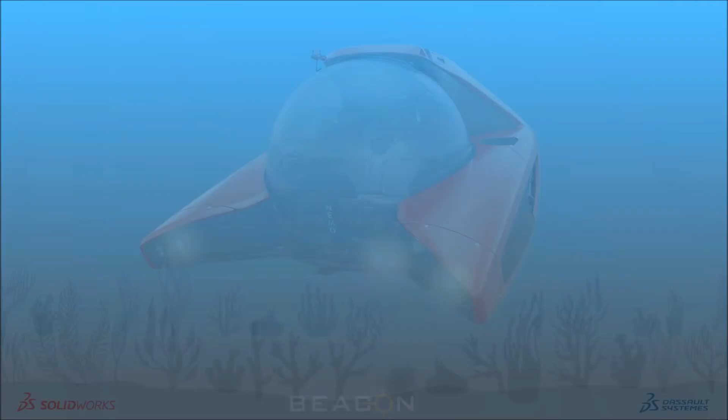What's new for SolidWorks 2022? To do this, we are using a data set featuring our long-term customer from the Netherlands, U-Boat Worx. They are launching their Nemo submarine, the name of the submersible vehicle, which is a luxury product called Nemo. We are going to use this data set throughout the presentation to show what's new in this release. It is one of the most sophisticated pieces of underwater tech available to customers, an award-winning revolutionary design personalized for individual use. We are proud to be part of their innovation all the way, and we would also like to be a partner for your next great product.

SolidWorks 2022 is the 30th release of the tool. As usual, new enhancements in this release are power-packed to work smarter, work faster, and work together. This is the theme that the complete SolidWorks 2022 release is being built upon. Now sit back and take in everything new in SolidWorks 2022 and the 3D Experience Works portfolio.

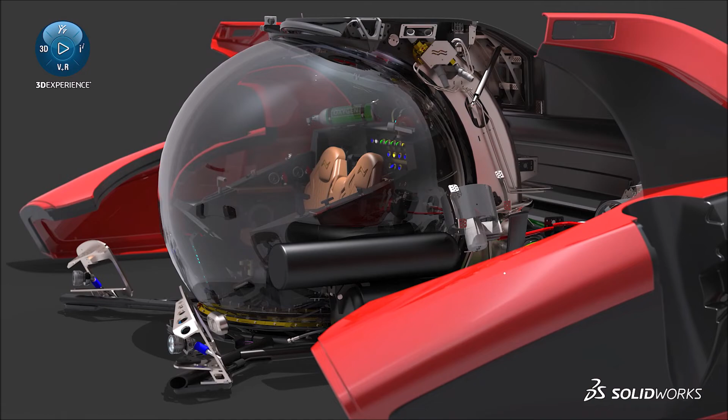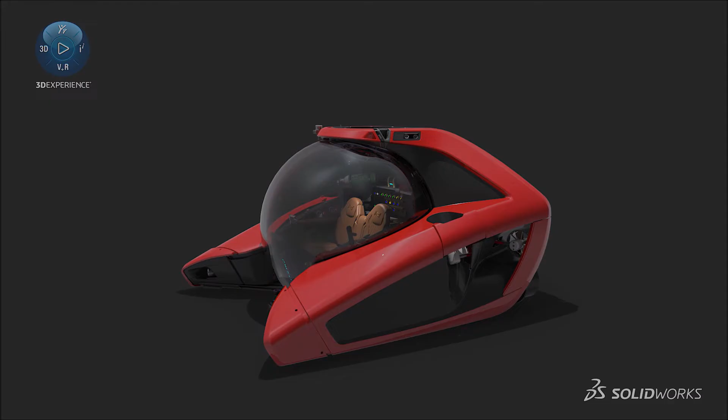The complete enhancement set for the SolidWorks 2022 release has been segregated into three segments. In this webinar and presentation, I'm going to touch base on SolidWorks 22 on the surface to give you the greatest enhancements, and then we're going to take a deeper dive to look into more detail of the enhancements. For the 3D Experience Works portfolio, which has the deepest capabilities, I'm going to give you a gist of it, but we have an upcoming webinar where we'll cover that in more detail.

So SolidWorks 2022 on the surface. Let us begin with it. Again, as I told, the theme for this complete release has been around working smarter, faster, and together.

Let us look at one of the smartest enhancements. Being a SolidWorks customer and user, you must be well aware of one of the unique features, one of my favorites while using 3D CAD inside SolidWorks, for maintaining different versions of the design. That is, by default, configurations. Configuration has been there with SolidWorks for a long time now, and it's been used to create different versions, different variations of the products, whether you are at part level or assembly level.

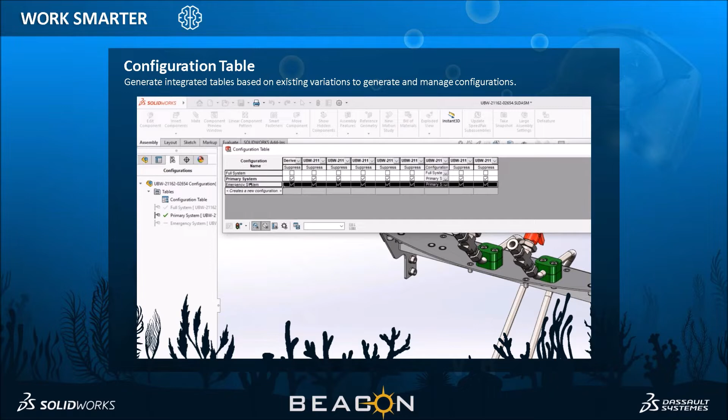Yet another announcement on Work Smarter is something called component pattern, pattern-driven component patterns. It has been smart enough to understand the way the patterns are being done, and to leverage each and every feature of the components mating to one another. So it has been enhanced to be more smart.

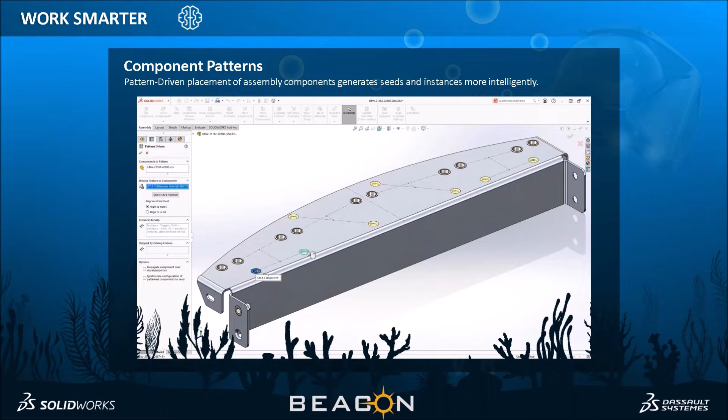What's new for 2022 is a brand new user interface to manage your geometrical tolerances. We have a brand new user interface so that the complete step-by-step workflow allows you to define the most complex requirements in terms of manufacturing intent.

Yet another new tool that's brand new to SolidWorks this year, in the 2022 release, is something called the Stud Wizard. We have been working with hole wizards, advanced holes, so threads - this is a brand new enhancement. We are going to have a deeper look into this as well.

Yet another mantra towards SolidWorks in this release is how we can work faster, the need of the hour, as the designs are getting more complex, getting larger, with more complex details. So we have a few enhancements which are really great and time saving.

One of the enhancements in terms of user interface for this year is something called command search, which has been unified with the S key keyboard shortcut. You can directly search for commands with just the S shortcut. That's another enhancement coming to your mouse pointer.

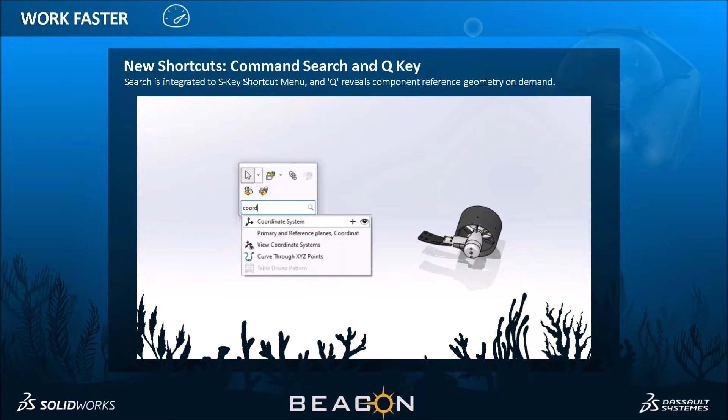Another enhancement on work faster: now you can directly open detailing mode drawings from Large Design Review. So now you have greater access, toggling between large assemblies in a 3D CAD environment and moving them to the drawing environment for more detailing.

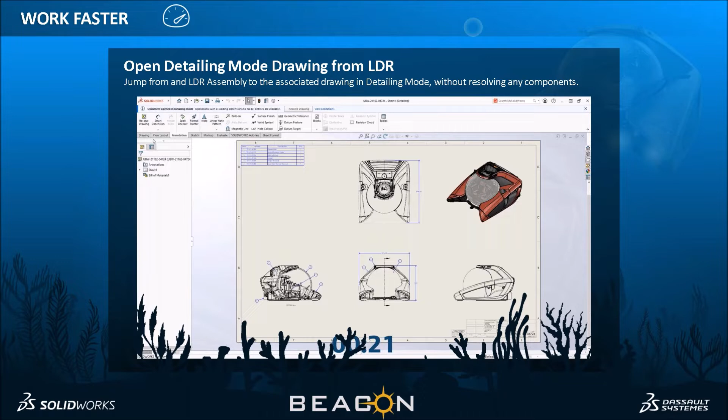Yet another enhancement towards working faster is now you can directly open up sub-assemblies in large design review or lightweight mode.

The quick mate toolbar, which has been people's favorite in terms of mating components and reducing your mouse travel time and clicks, has more enhancements and has been made more intuitive to use from this release.

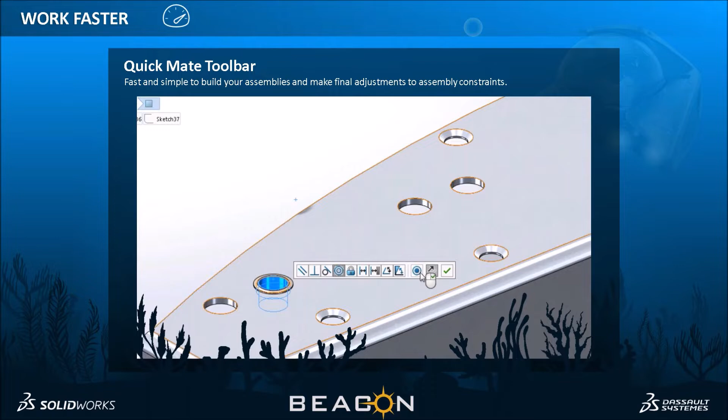Coming back to the detailing mode, from design to manufacture, we have more enhancements towards how you can add new standard views, how you can incorporate hole tables, and all of this happening in the detailing mode, which were not there in earlier releases of SolidWorks.

Moving to the next segment, that is work together. We have a brand new tool which has been there since the last 2 or 3 releases of SolidWorks - that's cloud-based sculpting, which comes up with new workflows and new powerful subD modeling solutions as part of the 3D Experience Works portfolio.

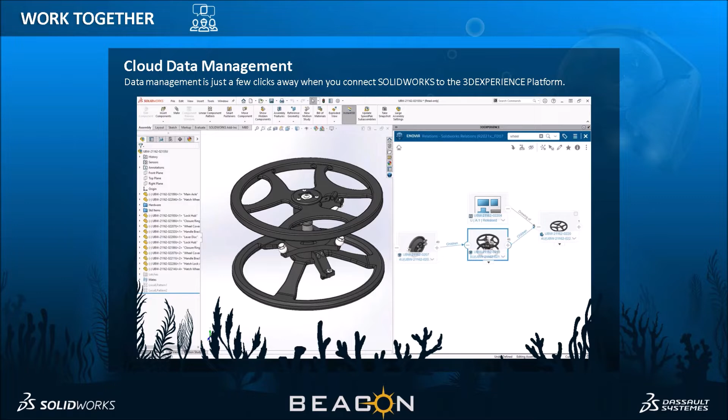And in the 3D Experience Works and 3D Experience portfolio, we now have cloud data management powered by ENOVIA PLM, and simulation without limits - a lot of capabilities coming in from the Simulia brand in terms of structural, fluids, plastic injection, electromagnetics, where you can take your SolidWorks models and have a tight integration, pushing them to Simulia workflows.

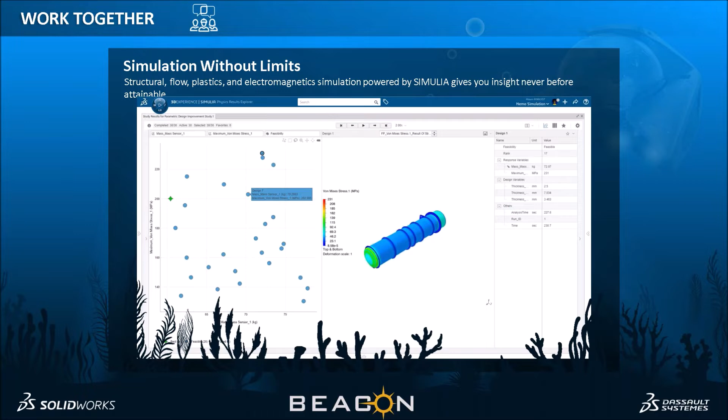Yet another offering from the 3D Experience Works portfolio is SolidWorks in a brand new avatar, called 3D Experience SolidWorks. This is one of the out-of-the-box platforms having inbuilt PLM technology, where you can have connected workflows.

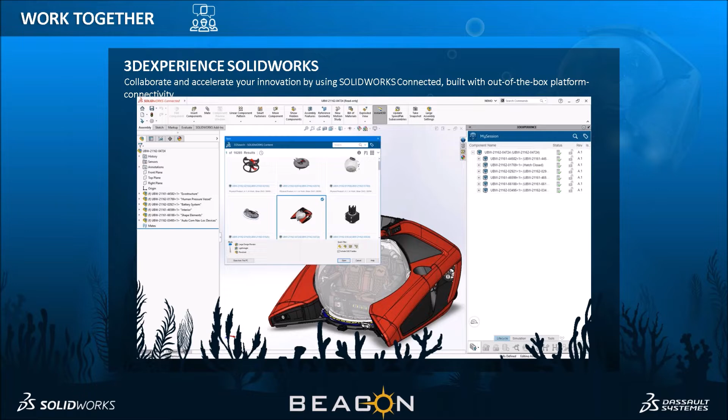So let us move towards a deeper dive for SolidWorks 2022. I would like to start with this session by showing the enhancements for the user experience.

As we saw on the surface, we have the command search now integrated in the shortcut bar. We have more enhancements toward coordinate systems in terms of how we can define them. We have a brand new shortcut, the Q key, coming in the keyboard shortcuts to increase productivity. We have a lot of system control options for how you can control dismissed messages, notifications, and bars. And one of my favorites in this section is the pack and go, which now gets a progress bar. So let's go have a look at these enhancements.

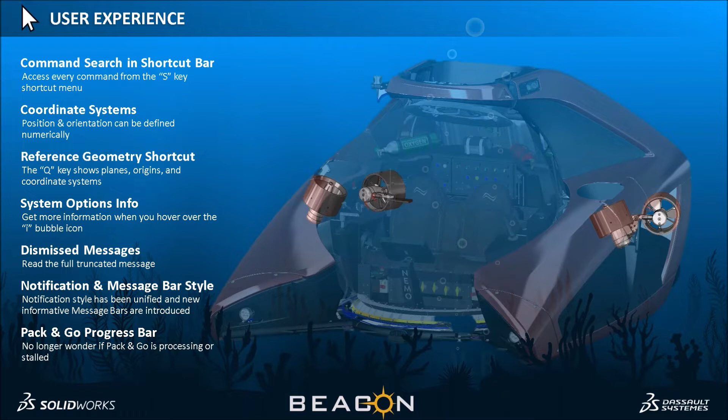SolidWorks 2022 helps you be more productive with powerful user interface enhancements. A Nemo submersible is not complete without all its thrusters in place.

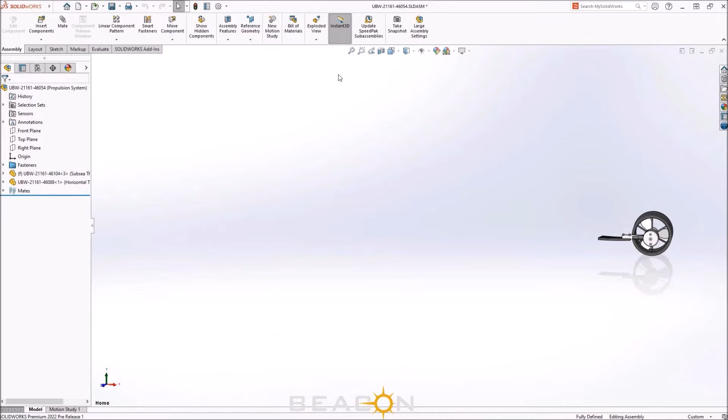In SolidWorks 2022, as we were discussing how the command search engine is integrated, now with just a stroke of a key, the shortcut, the search command is integrated, and you can have SolidWorks show it to you in the command manager as well.

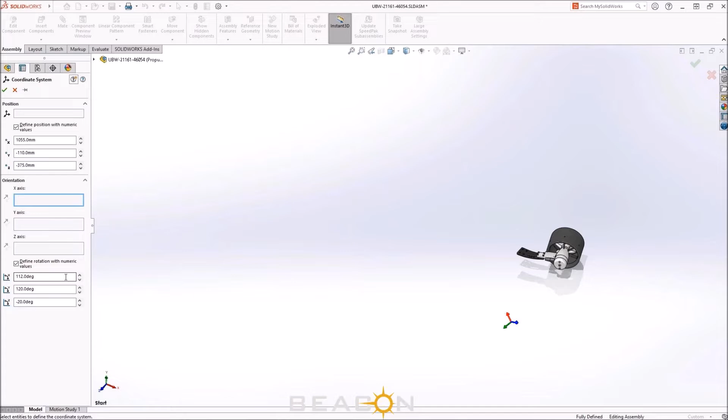In SolidWorks 2022, coordinate systems can be defined by user-specific numerical values, giving you complete control on how you orient the component and define it using numeric value input. This is a brand new enhancement.

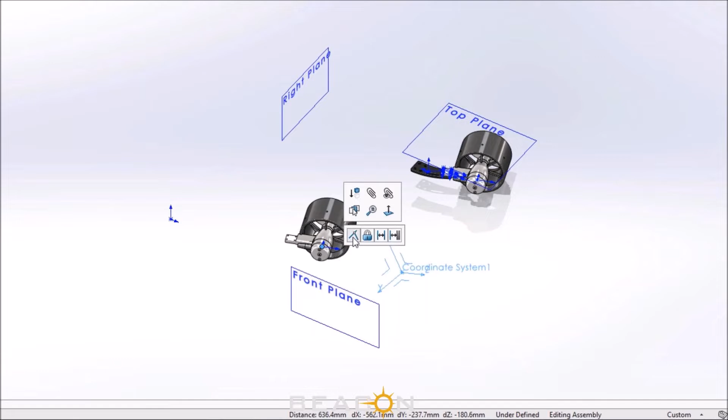Origin visibility is currently turned off to reduce clutter on the screen. With the new Q key enhancement, you can toggle between part or assembly reference geometry such as planes, coordinate systems, as well as origins.

Coordinate systems have also been visually and functionally changed. Their axes, planes, and even points themselves can be used to create section views, sketches, and more.

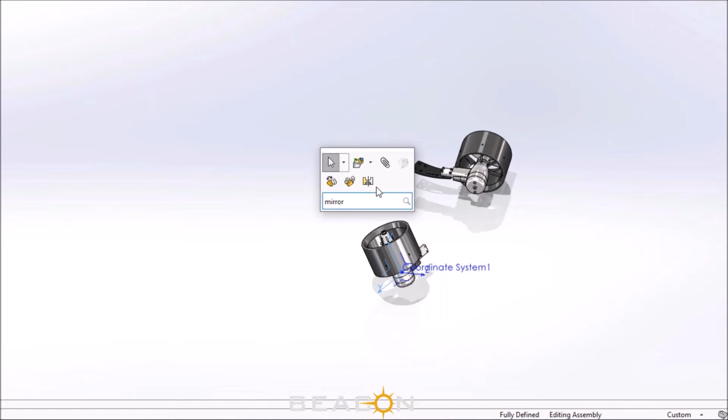These thrusters need to be mirrored on the other side. A commonly used command like this can be conveniently added to a shortcut key with just a stroke of a click. And the new Q key shortcuts even work while creating features.

Many other components of the user interface have been overhauled to give you a more appealing and visual experience. These bubbles appear throughout the system options, giving you more insight into the settings. Dismissed messages have always been easy to show again, but now hovering over them gives you more insight. Notification reminders like this have now been unified in style and appearance.

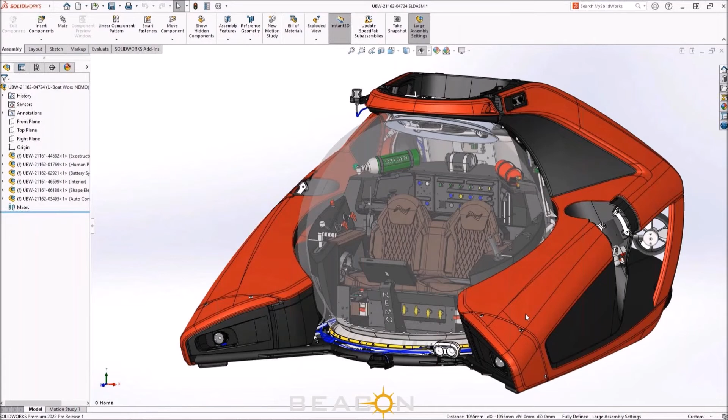The most favorite topic, that's pack and go. That's one way where you can collate the complete project with all its reference components. Now these tools get a progress toolbar, and that's why it's one of my favorites -- you can directly know how long these components are going to take to get packed and loaded. The world's most user-friendly 3D CAD software is now even easier to use.

Moving ahead, we have enhancements coming in the parts environment. We have enhancements in hybrid modeling which ease a lot of workflows for people working with vendors and different B-rep mesh geometries. We have some enhancements made to the hole wizard slots in terms of how you can orient them.

One of the most asked-for features: now we get an enhancement for draft on components, where you now have the option for a bi-directional draft. We have some enhancements again in pack and go in terms of component referencing. We have a section plane which can be taken on an axis, cylindrical face, or conical face. There's a brand new stud wizard and configuration property. Let's take a deeper dive into this.

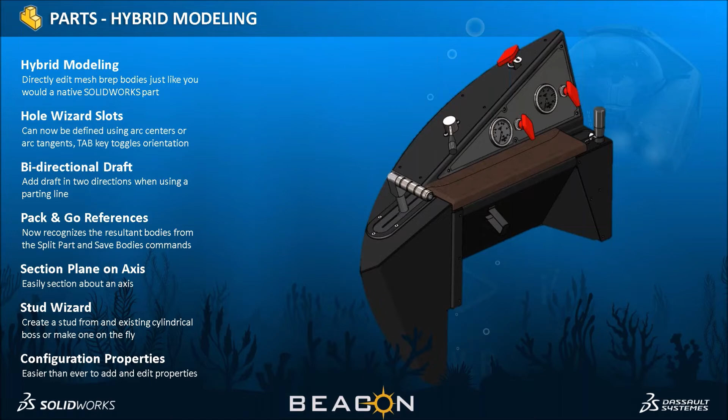For designers, the ability to create manufacturable products comes with an ever-increasing variety of file formats. So SOLIDWORKS 2022 now makes it easier with the new enhancement using B-rep mesh formats. In this example, for the ball valve on the control panel, it looks perfect, but the handle is too plain for a luxury product like the Nemo submersible.

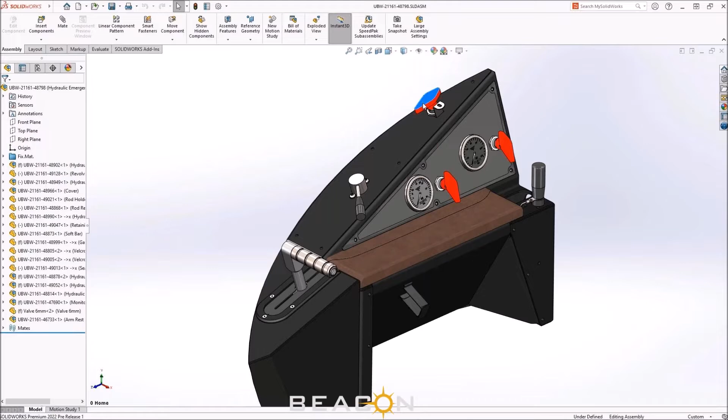The supplier has provided these particular files in B-rep mesh formats. But in SOLIDWORKS 2022, working with these files is just like working with native geometry, thanks to the new hybrid modeling capability. Now you can directly create chamfers, extrudes, and such features without needing to create intermediate bodies -- it's just like working within the native SOLIDWORKS CAD environment. This is my personal favorite. Now this particular handle needs a slot to lock or restrict its rotation.

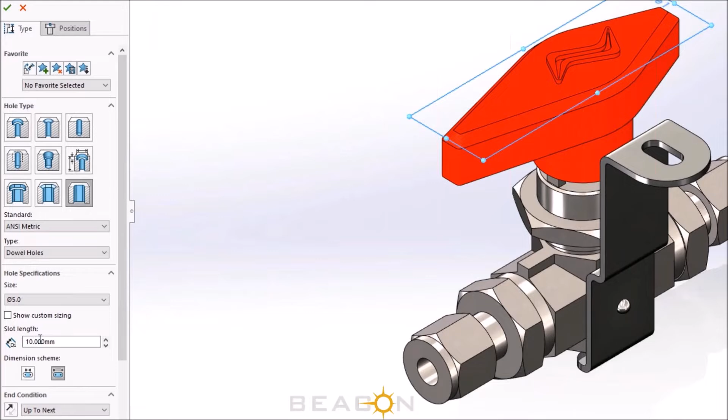In SOLIDWORKS 2022, we have an enhancement to the slot in the hole wizard, where you can define the length of the slot either by defining the arc tangents or the hole centers. Also, using the tab key, you can toggle between vertical and horizontal positioning.

Manufacturing this handle needs a bi-directional parting line draft, which is the most appealing approach. In SOLIDWORKS 2022, you can now create drafts in both directions using a single draft command with a parting line draft, avoiding the need to create two different features.

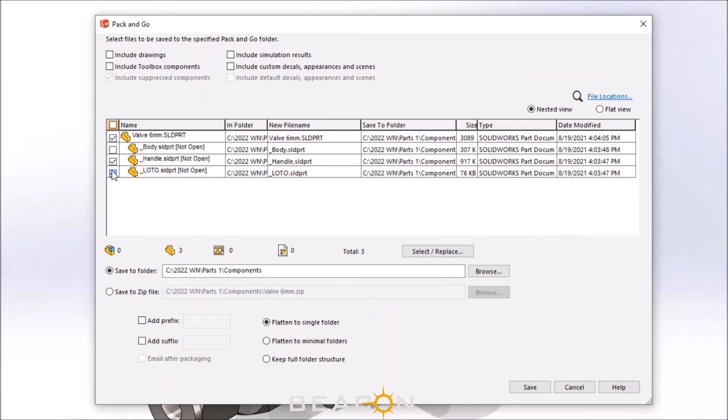This multibody file contains 3 different bodies, but the manufacturer needs access to the individual components. In SOLIDWORKS 2022, Pack and Go now recognizes the features and references created when using the Save Bodies and Split Part commands, so you can choose which files to send without manually searching in Windows Explorer.

Section views are a great way to show and inspect details. Now you can specify section views from any cylindrical face, conical face, or even an axis.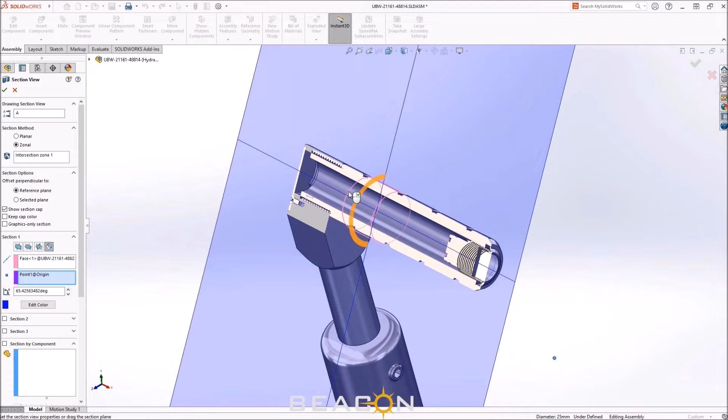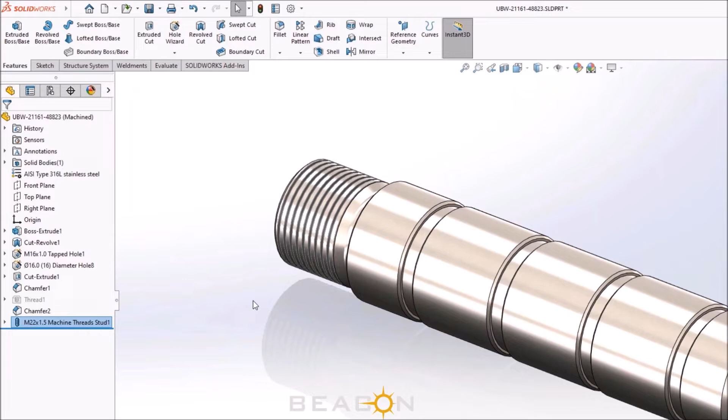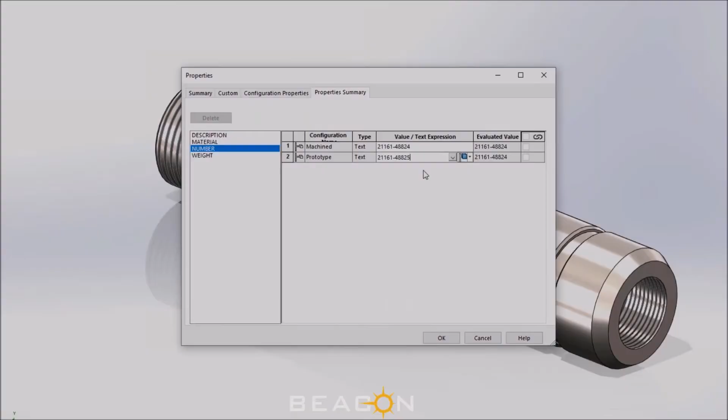What's new for 2022 is configuration, which is now segregated into configuration properties and property summary. In the first tab, property information can be added in the conventional way, choosing which configuration the values need to reflect. In the second tab, you can compare custom properties of each configuration and have greater control over how you make changes.

Moving to the next subsection, assembly performance. Most SOLIDWORKS users building large assemblies have at some point faced issues manipulating larger assemblies, in terms of opening times and manipulation times. To address this, SOLIDWORKS, over the last couple of releases, has come up with a lot of enhancements on Large Design Review mode, or LDR as we commonly call it. LDR mode now has more enhancements.

This is one of the lightning fast ways to access your assemblies with very few limitations. Let's take a look at how this assembly performance has improved.

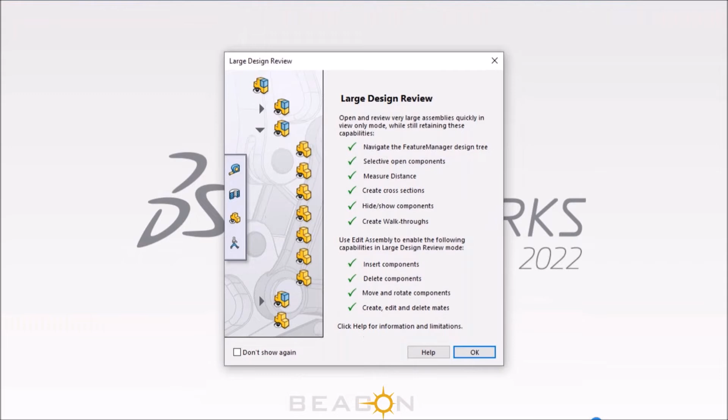The Nemo submersible is very complex, with around 6,031 components from U-Boat Worx. This complete assembly opens in merely 12 to 13 seconds. Let's put a clock on it and check. 6,031 components just loaded within 13 to 14 seconds, and it's up and running. This is one of the brand new enhancements on the LDR mode.

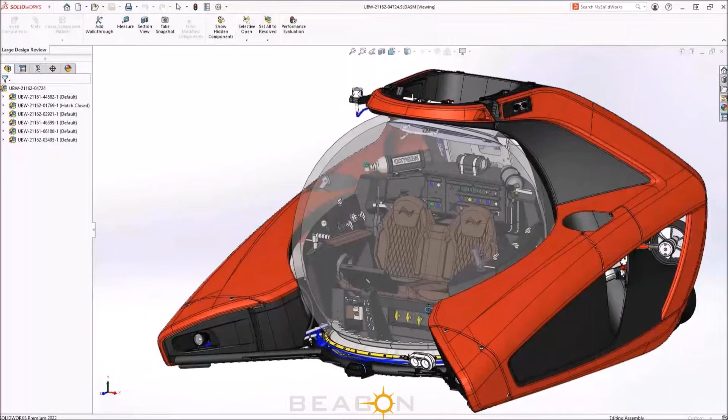What's new for 2022? You can directly access drawings of large assemblies from the right mouse click menu. Detailing mode is the most efficient way today to open and work on larger assembly drawings, and similar to Large Design Review mode on the 3D side, drawings now open in about 20 to 25 seconds. This is one of the great announcements which I have personally liked.

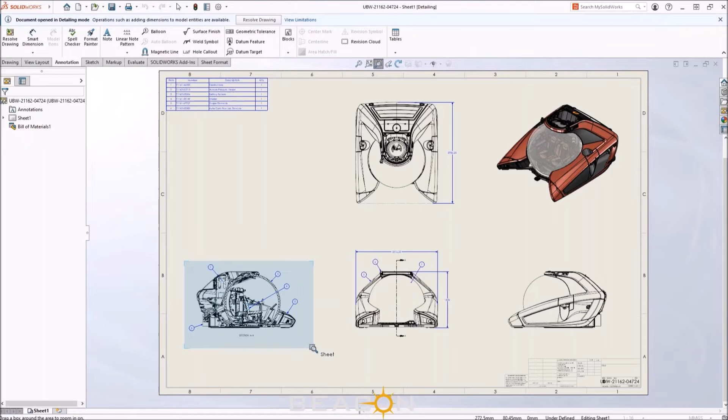It's an interactive way to work with large drawings and previously created views. You can continue detailing your design by adding dimensions, notes, tables, annotations, balloons, and more, with the ability to quickly access drawings from Large Design Review mode. This way, you streamline how you work with large and complex designs.

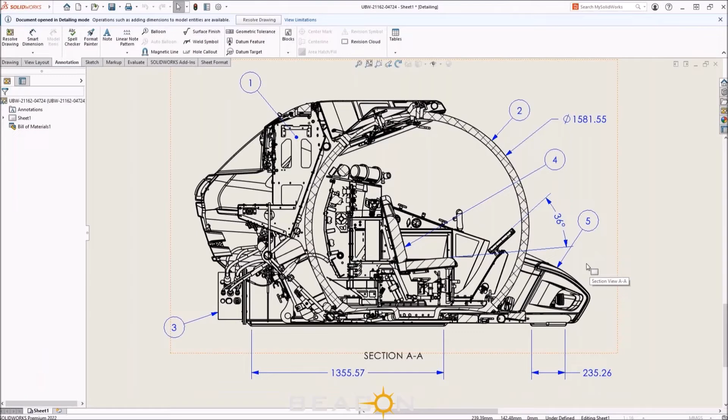Additionally, in SOLIDWORKS 2022, you can also open sub-assemblies in resolved mode or lightweight mode. This way, you can access the components in more depth and detail if you want to edit them.

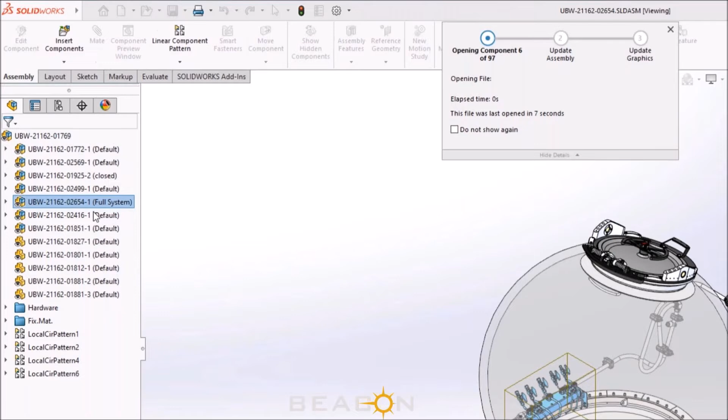So for this example, we are opening up one of the sub-assemblies in the resolved mode so that it is accessible and editable to us. You can choose a part, assembly, or sub-assembly through the breadcrumbs to be opened and made accessible.

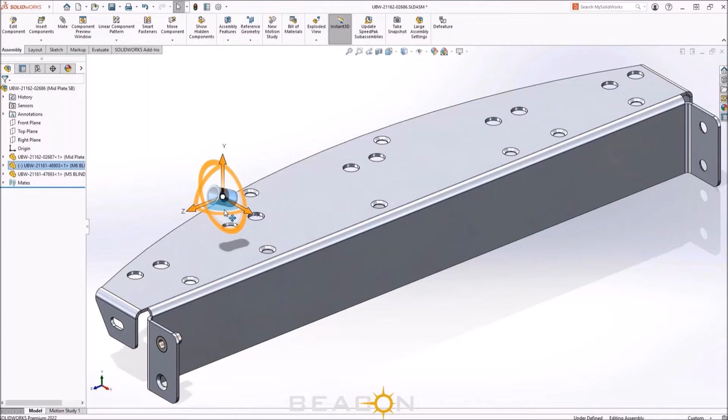What's new for 2022 here is moving the component. The moment you select a component from your feature manager, you now are introduced with a triad, which makes it simple to orient the component in the desired direction.

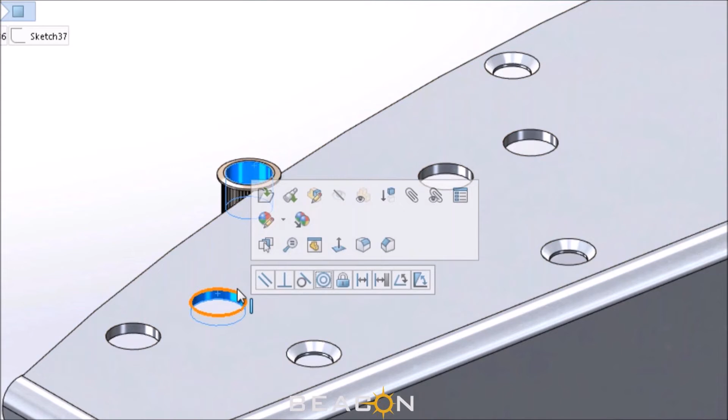The quick mate toolbar, which I've been discussing, now has more enhancements. It gives you more control in terms of how the components are aligned and mated to each other, whether you want to lock the concentric rotations or change the orientations, on a circular or conical geometry. The flipping options and concentric lock options are now made available on the quick mates toolbar itself.

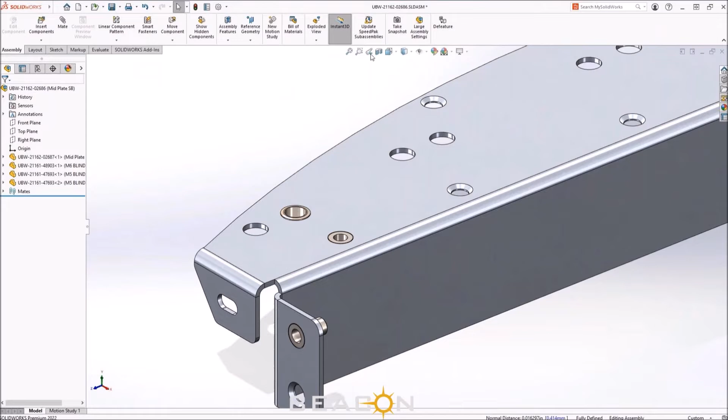The more intelligent, pattern-driven components are now more intelligent as we get an option to select the seed position. Here, as you can see, the selected seed position has been populated. But what happens if I change the location of this component?

Let's see it live. The moment I change the selection of the component for the concentricity, the pattern-driven component is still intelligent enough to understand the seed and put in all the patterns required, with all the intelligent hole wizard features that have been used in this design. So that is a time-saving intelligent pattern, I would say.

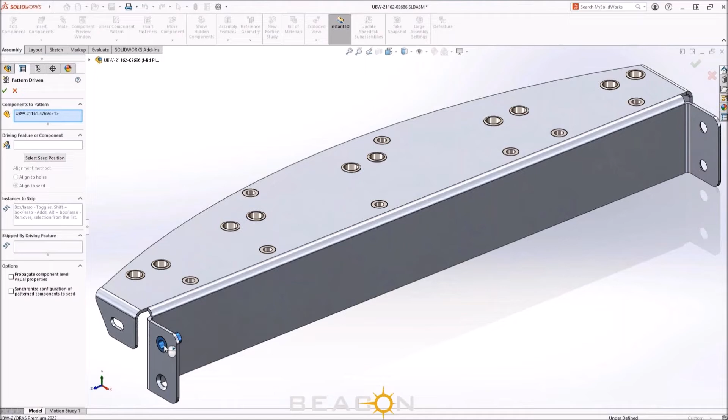Coming back to the configurations, configurations have always been a powerful way to create alternate versions, as I was talking about. You can have instances of components included or excluded from the different versions of the design, and the possibilities of using configurations are endless.

But as you start creating more and more versions in a single document of the file, keeping track of this can get complicated. So what's new in SOLIDWORKS 2022 is a new configuration table. This table makes it much easier to manage such configurations.

From the table, you can add new versions. You can also choose to toggle suppression states. And the configuration table is also bidirectional.

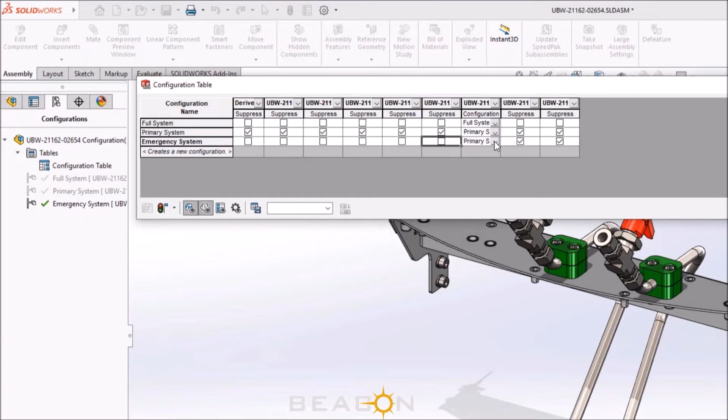So what do I mean by bidirectional? Let us have a quick look at it. Now, if I make any changes to the suppression state on my graphical user interface, just like this, using some commands on screen, all of these changes can be tracked back to the configuration table. So any changes you make in the configuration table show up in the GUI, and any changes you make in the GUI show up in the configuration table.

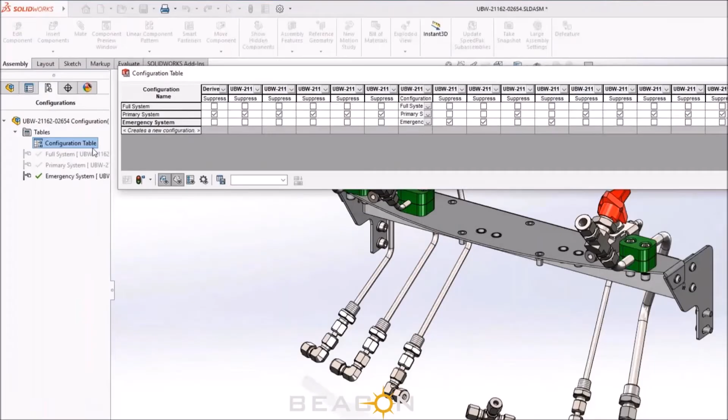It also comes up with very powerful filters in terms of features, parts, and configurations, and you can have access to the important information you need at any given point of time.

So moving to our next set of enhancements, that's drawings. When you talk about design to manufacturing, drawings become one of the most important ways we communicate. We have a lot of enhancements in terms of drawings in how you can detail your drawings.

We have a brand new detailing mode, and now you have a greater way to toggle between circular dimensions, between radius and diameter. We have a brand new symmetric linear diameter for turned parts, which will be very helpful especially for that workflow. And geometric tolerances have a brand new user interface.

We have more enhancements toward the bill of materials, incorporating the detailed cut list. This has been a long-asked feature. To give you a use case: if you're using a complete assembly with parts made from different weldments that have been assembled together, correlating the top-level bill of materials was challenging in terms of correlating all the cut lengths and cut lists. But now with this new functionality, you can promote and show the weldment cut list of any type in the assembly bill of materials, so you get a unified cut list in the bill of materials. That's one of the new enhancements.

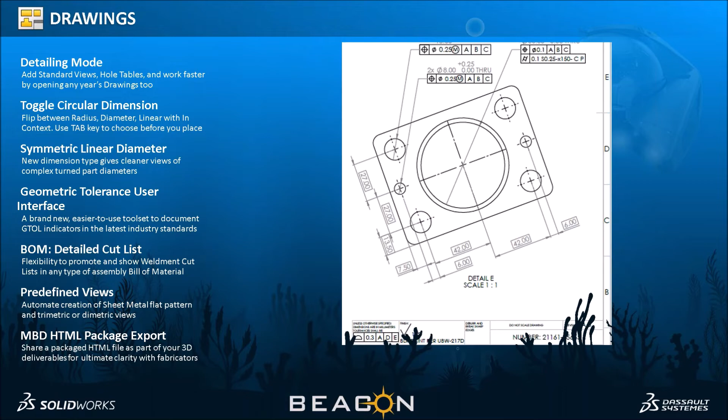For companies like U-Boat Worx, there is a requirement that they need to build it right the first time. This means they have to be communicating through SOLIDWORKS drawings, and sometimes, using drawings like this for larger assemblies with more details can get really huge.

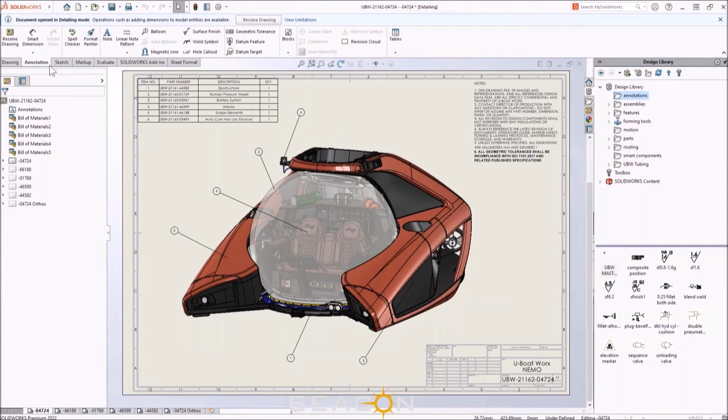For the past 3 years, detailing mode has been there and it has been evolving, and you can open larger prints in a matter of seconds. You can add dimensions, annotations, hole tables, and whatnot with this new enhancement.

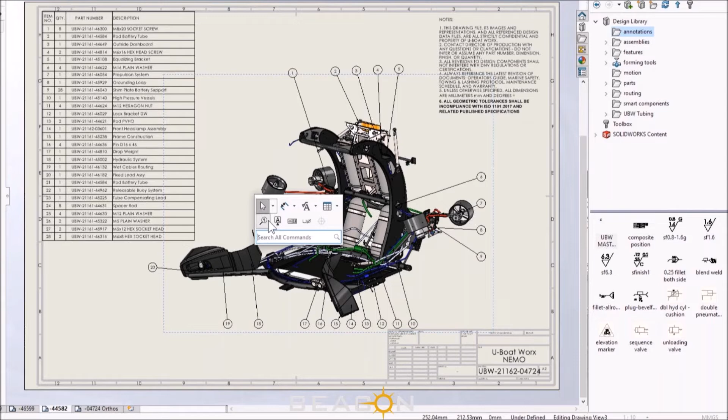And the brand new enhancement here, which is going to come up now, is one of my personal favorites. So I'll take a little pause there and try to highlight it. You can also easily print this complete drawing to PDF right from the detailing mode.

So we have the save as option or print as PDF options, where in a matter of seconds you can print your largest drawing. So the favorite part comes here.

So what if you have never used large design review mode, or never used detailing mode, and your drawings have been saved in a previous version of SOLIDWORKS, like this one. This has been saved in the last release, that is SOLIDWORKS 2001.

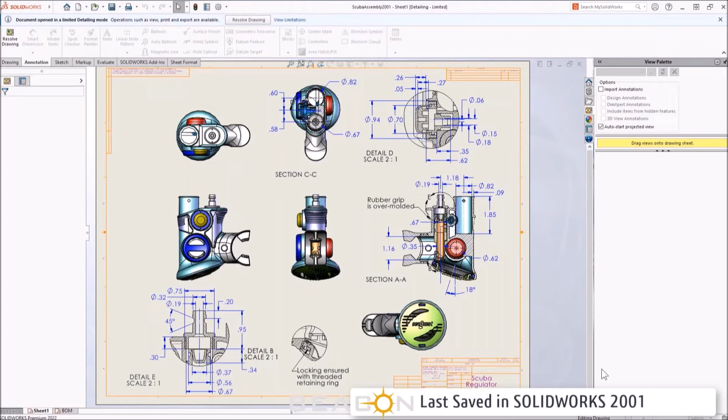Now, the greatest extension that SOLIDWORKS 22 brings to the table is here. You can directly open any lower version drawings without even having the 3D CAD objects in the background, right to the detailing mode, as you can see on the screen. This also leverages how you can convert the older drawings into the latest PDFs and have them up and ready for the downstream processes.

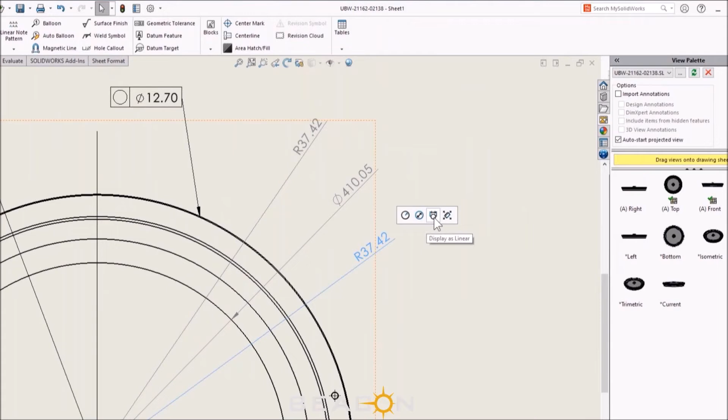At another enhancement now, drawings now get the in-context menu. Just by clicking on the dimension, you get the in-context menu to toggle between the different dimensions and the way you can convert them.

And a brand new way where you can dimension today is something called linear diameter dimensions. These are like double dimensions, which can be applied on a single click, either to the silhouette edge or for the batch.

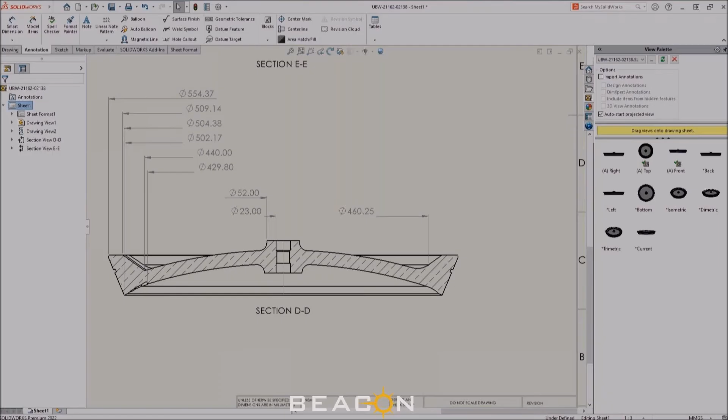GD&T allows functional definition for the component features and allowances, so we can clearly illustrate manufacturing intent.

SOLIDWORKS 2022 now introduces a brand new user interface to define GD&T. This is intuitive, step by step, to define range, offset, feature, characteristic, material conditions, symbol, all defined in a very strategic way where you can go step by step and have them framed together.

So having the plus small symbol there, either you can add or remove that symbol.

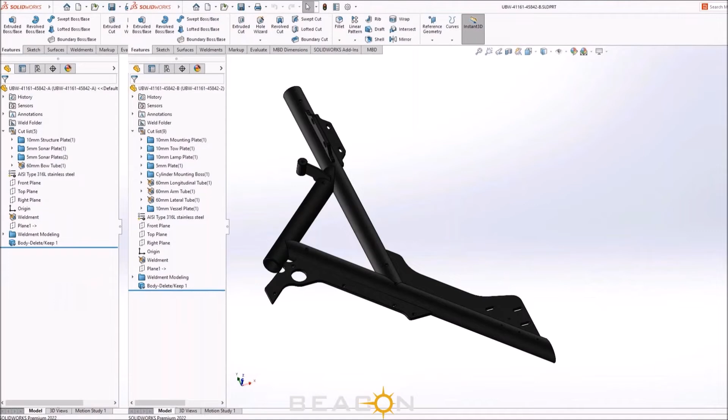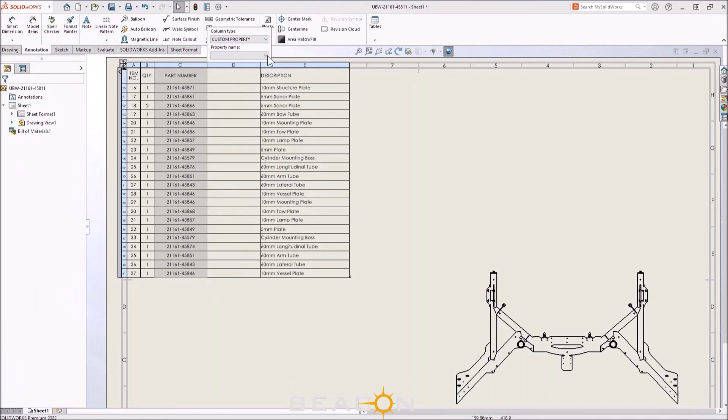And I was talking about assembly of parts containing weldments. Now, SOLIDWORKS 2022 allows a greater way to extract the detailed cut list of such assemblies by collating all the information from part level. The great thing here is this can be accessed at any kind of BOM level, either indented, parts only, or at top level. So this is one of the greatest enhancements.

We also get a new way to have a predefined view in terms of sheet metal flat pattern, having bend lines and bend notes. It also gets a new toggle key for bend lines for communicating your right manufacturing intent.

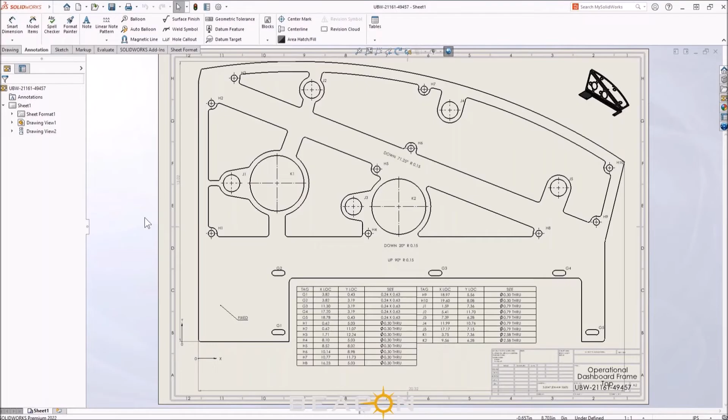So Visualize gets a ton of new enhancements, which have been very pleasing for me, and I have been liking these new enhancements because I myself have struggled in getting the right photorealistic image outputs, and it needed a lot of trials. We used to run multiple trials, multiple renders, and then arrive at more photorealistic image outputs. So now we get a brand new match camera.

So basically you can align 2D perspectives, that's the background image 2D perspectives, to 3D geometry, which was the Herculean task for me especially. So that gets a new enhancement.

Then we get something called a shadow catcher. We'll have a deeper look into shadow catcher and how it can help you get more photorealism into the image or the videos.

And we also get a brand new pattern instances where you can pattern 3D objects into the environment. We get scatter pattern enhancements to randomize the geometry. We get brand new animation grouping, camera switching support for the animation, and some enhancements towards the output viewer.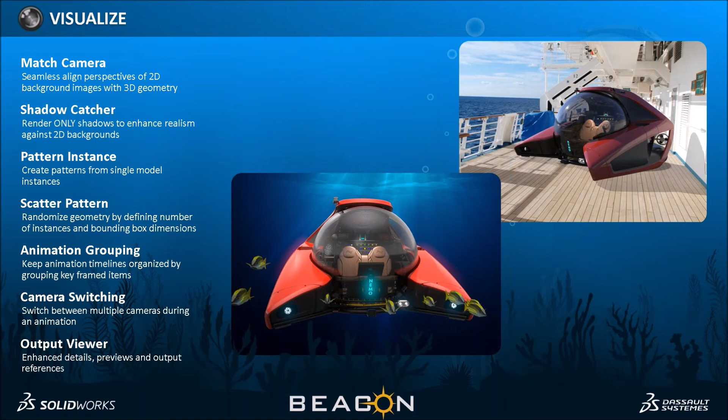So why Visualize? Bringing concepts to life in the early stage of design through product renderings and animations can help accelerate sales and marketing initiatives. So let's see how Visualize 2022 makes it easier to generate professional level output for any user.

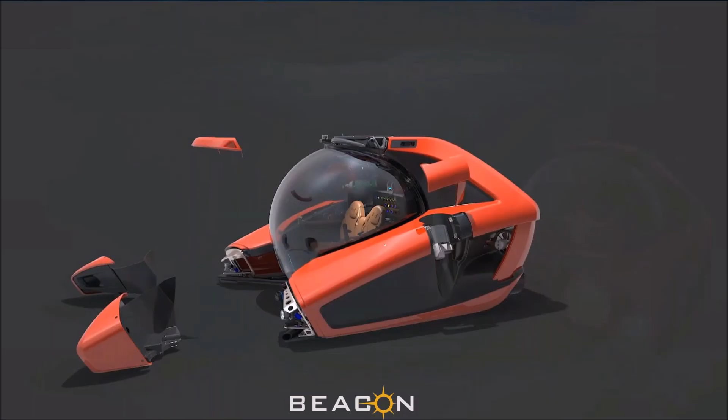HDRI environments, or the background environments, have been supported in Visualize. These 3D assets not only apply a background image but also include scene lighting. This lakeside environment has a perfect sunlight source, but the background image needs to be more appealing to target commercial audiences.

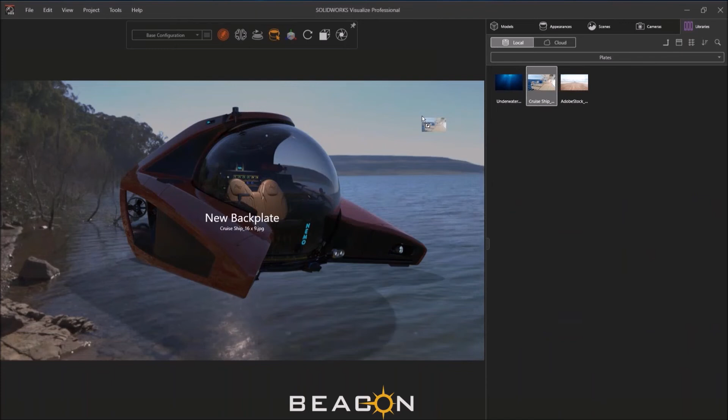The 2D stock image can easily be used and comes in all shapes and sizes. These can add a perfect touch to any rendering, but it requires a trial and error process to get the right model's perspective aligned.

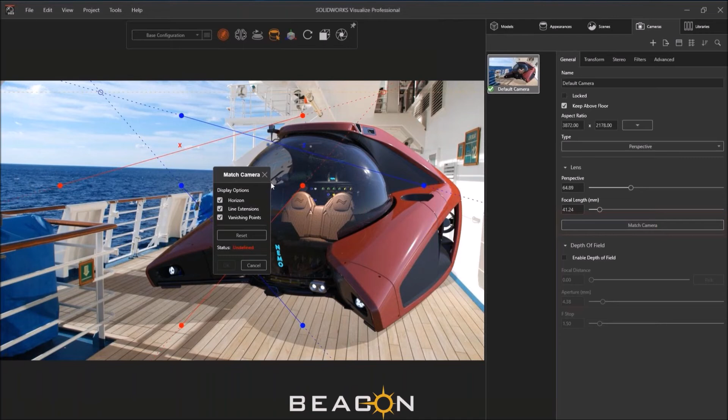So Visualize 2022 comes with match camera capability. Using the 2-point perspective of the horizon, along with the ship's structure and walkway, the camera's focal length is now automatically calculated and applied to the 3D geometry. That's a great enhancement, guys. This builds additional photorealism into the project by seamlessly integrating the 2D image and the 3D CAD model. This no longer requires R&D.

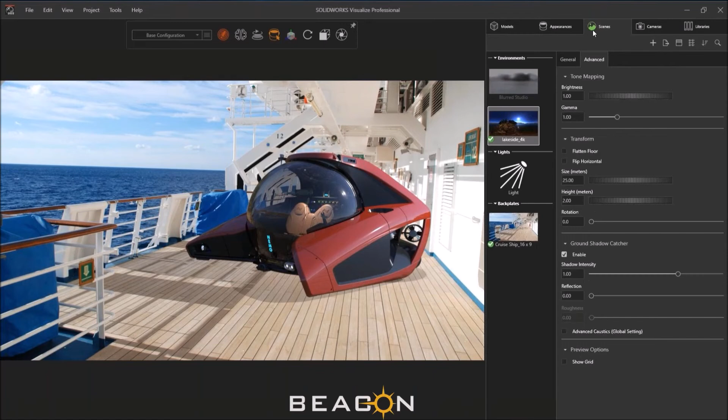The next step is to make sure the location of the light source and the 3D environment aligns with the source. By rotating the previously added HDRI environment, we watch the new shadows of the 3D model align with the deck shadow, which is easy, but unfortunately the shadow bleeds into the wall.

This is no longer a problem. By using a primitive, in this case a wall, the primitive geometry can be placed, and this comes in handy. Switching between the accurate and rendering modes, we can easily align it to the wall to match its perspective. What's new in SolidWorks 2022 is the ability to convert this geometry into a shadow catcher. The moment that's enabled, the shadow is automatically captured and rendered onto the screen.

This adds more depth and realism to this rendering. And for our next image...

Capturing Nemo in its natural habitat is a must, and the natural habitat is the underwater shot. To get the underwater shot, we are going to use this backplate. For an underwater shot, we need to get the light source.

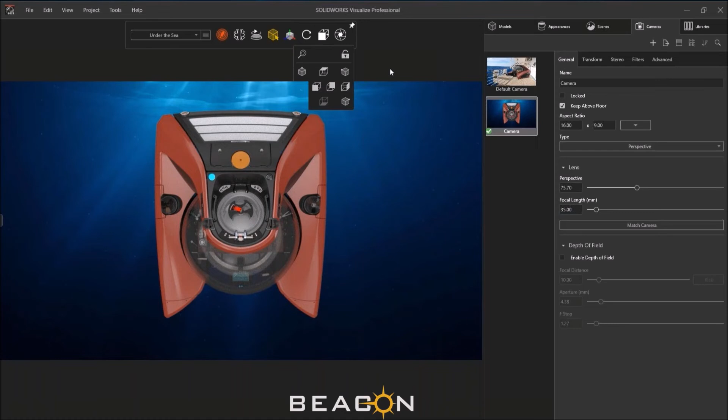In this particular image, what we are trying to use is an area light added from its top view. For this image, to get more realism into the rendering, we need some fish.

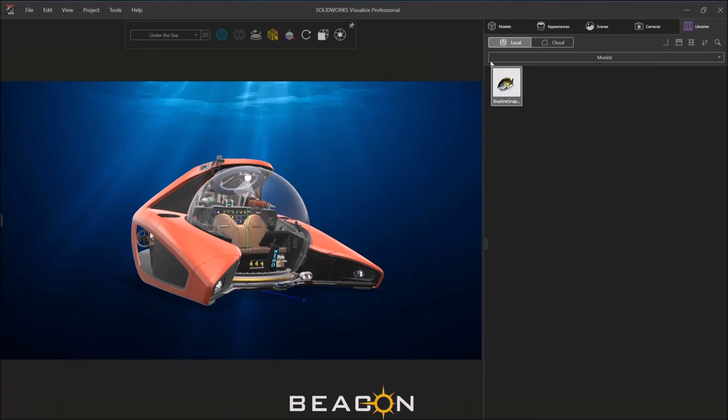So how about adding a fish? We can add this 3D asset from our library just by dragging and dropping and matching it to the scale. We have added a fish called the blue line snapper here, and by using a triad, we can directly align it.

But what if I want to add a school of fish? Do I have to go back to the 3D CAD and make it? No. In SolidWorks 2022, we get a brand new option called scatter. Just by playing with some numerical values, I can scatter the fish in a randomized way and create a more photorealistic image.

For the third rendering output, we need a configuration to capture the exploded view of the Nemo submarine. This can be obtained by using the configurations and having all of these renderings in the same project.

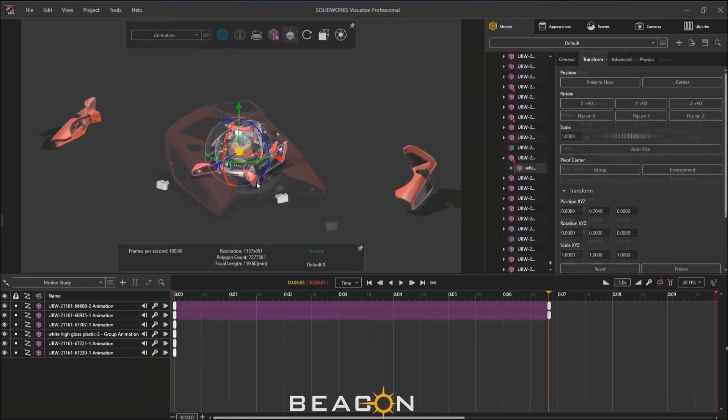With the timeline enabled, the keyframe start and end positions can be arranged to obtain a very cinematic experience. We also get grouping of those timelines, which makes it a breeze to manage at any given point in time, and it also comes with color coding to identify the groups.

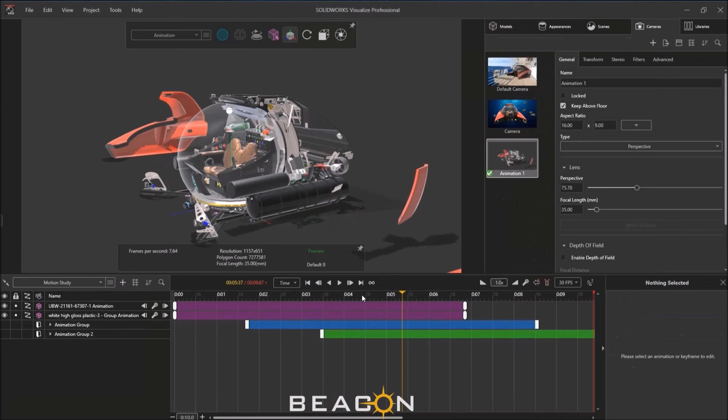Multiple cameras can bring a more professional approach to the output. We can have this captured by multiple cameras and link them to the keyframes, align them towards the keyframes, and use the grouping already in Visualize 2022 to get a more professional approach and outlook.

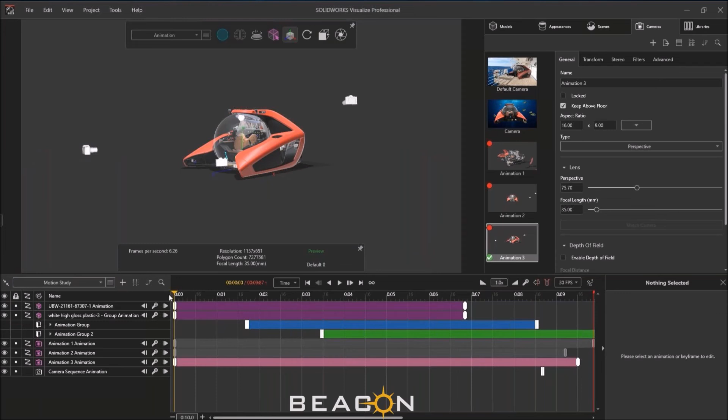So this is how the outputs are captured. We have a new camera sequence animation, as you can see. The camera sequencing can be done very easily, getting more professional outputs.

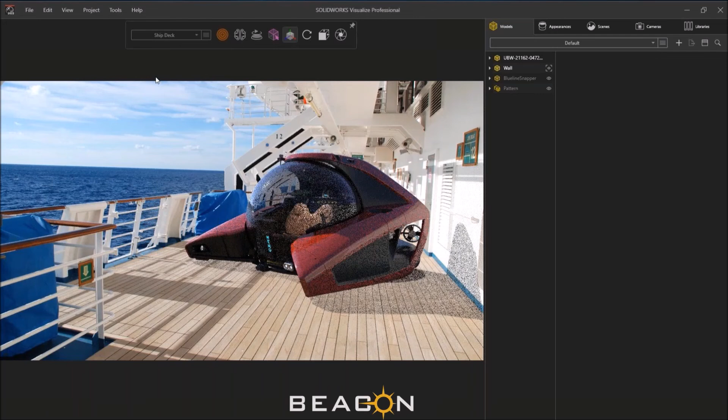What's new here in 2022 is something called the output viewer, which helps you organize the outputs and the way they are rendered, giving greater control on what to render, when to pause, and how to schedule it. This also gets a greater view and look to it, giving the user more control to know how the renderings are being captured and executed on the user's machine.

So as we have come to an end to this webinar, we have seen some of the best enhancements, some of our favorites, and some of the best workflows that can be achieved using SOLIDWORKS 2022 release.